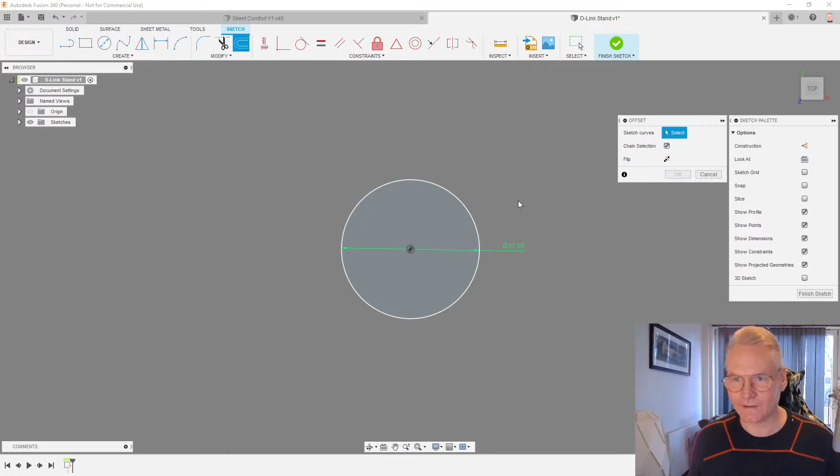Over to my screen, here we go. So I made this circle on the top plane, and I'm doing an offset. The offset's gonna go outside - sometimes it's a negative number, sometimes positive, so you just have to figure that out. This is a positive number. So how thick do we need this mount to be? I'm thinking 2 or 3 millimeter - let's do 3 millimeter.

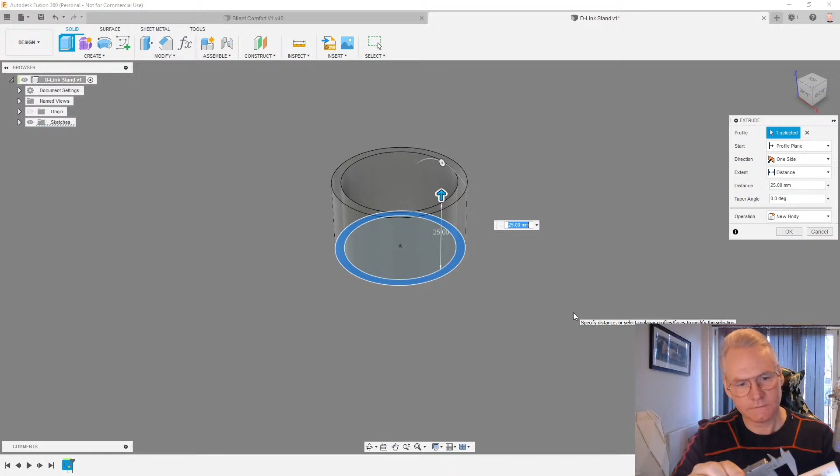Pretty easy, so I'm gonna finish this sketch and extrude it. I'm gonna extrude this up, and I'm not sure how high we need it - we don't need it very high. I'm thinking maybe 30 should be fine. Yeah, let's do 30.

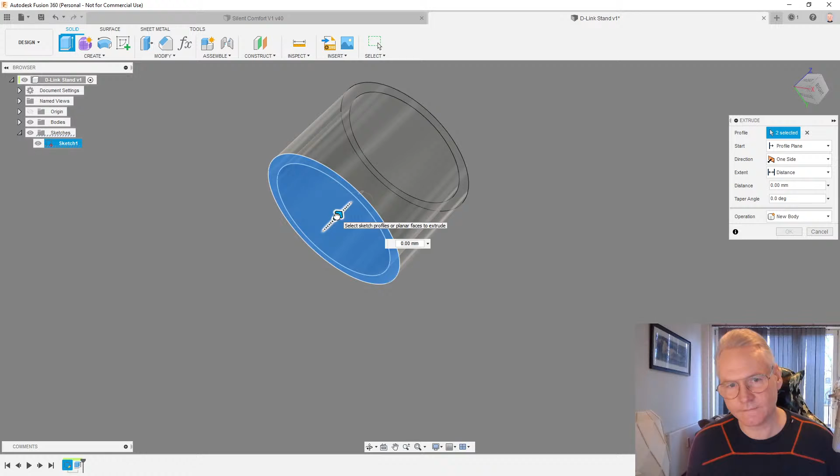But of course we also need a bottom, because now this is just a tube. So let's extrude our sketch again, let's do it negative, let's do it down. -3 should be okay. Yeah, let's just start with that and see.

So I'm gonna change the transparency, the color on my parts. I'm gonna do ABS white - that's A for appearance, and you just find ABS white under plastic. Of course you can change the color on this one if you want something else, maybe yellow, or whatever you want. Let's do it yellow.

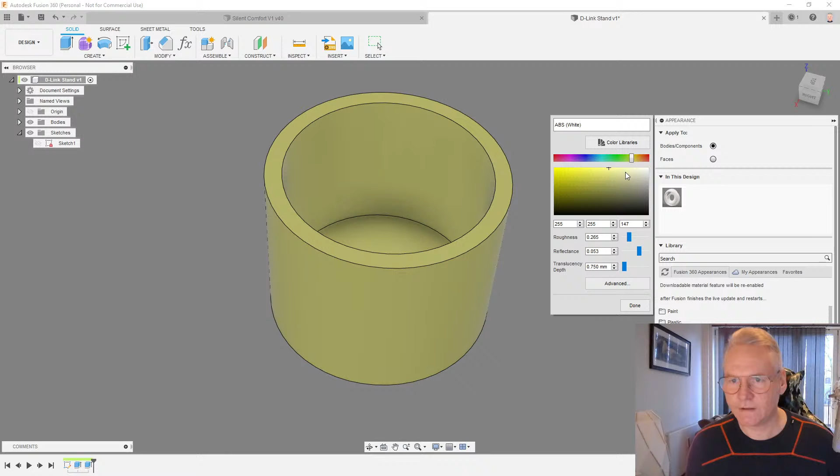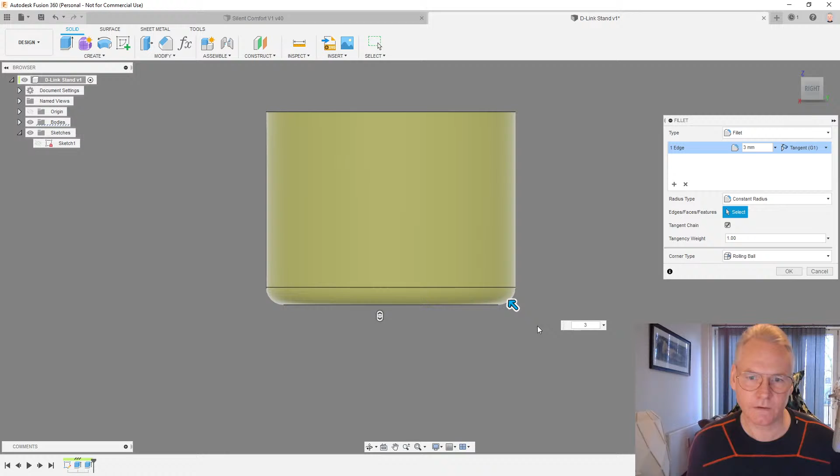We could maybe do a fillet here, let's do 3 millimeter fillet just for better looks. Actually, fillets in this direction don't print too good, because we have layers building up the fillet, and you have to go low on the layers to get a nice fillet. But let's just do it anyway. Chamfers print better in this direction. If it was fillets in this direction, it would print good.

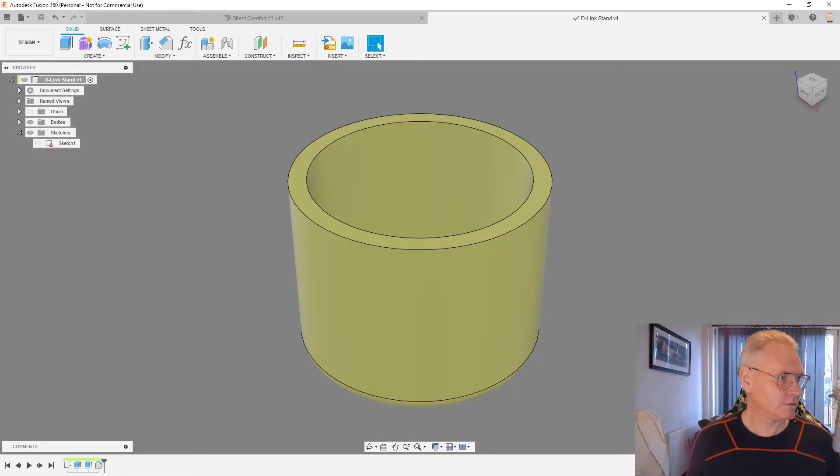And we need some holes in this guy. At this point, I'm not sure how we are going to make it. Let's do an offset plane. So let's just offset this 37 divided by 2, plus 3, should make it just outside.

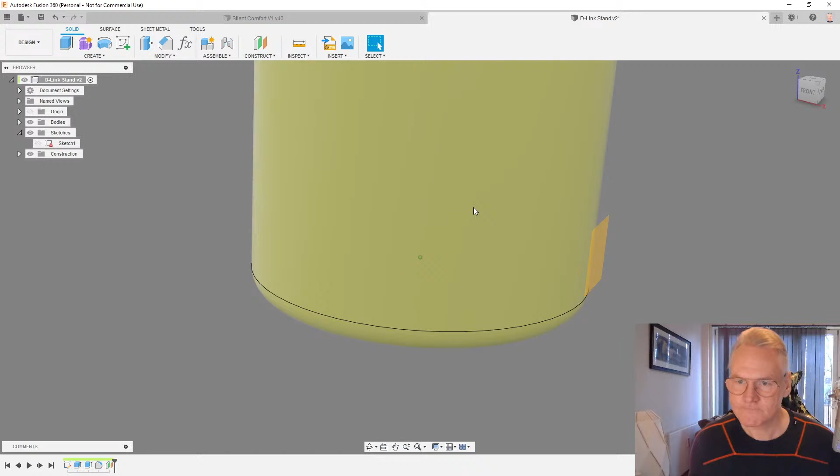So let's draw something here. Let's first project our body - P for project, select body in the selection filter, click the body, and just OK.

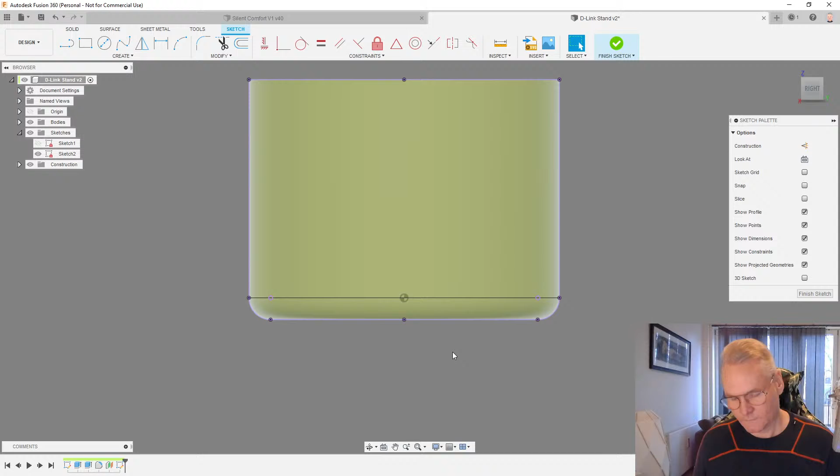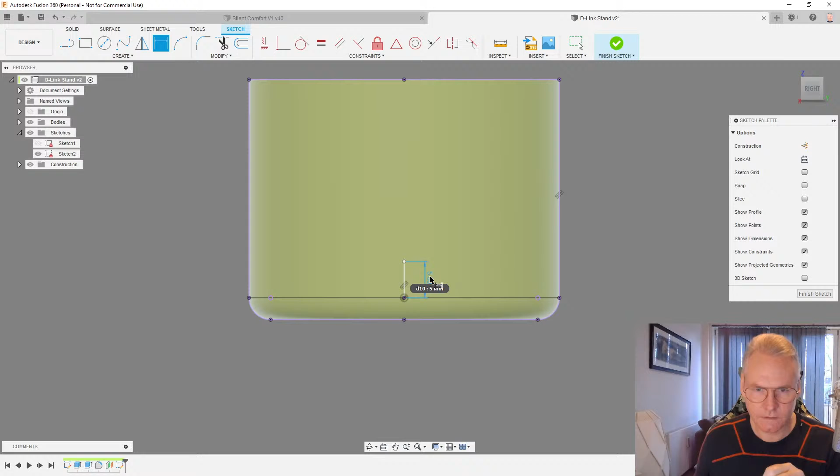So let's find the center of this body - should be about here. I'm gonna do a line, maybe like 5mm up. I'm thinking we are going to use some screws here, so let's just try with, let's do it 6mm. We can change this later anyway.

And let's do a C for circle. I'm gonna make that, yeah, let's do it 12. So this is now 12, since I connected to this point, and we have 6mm here, so this would be 12.

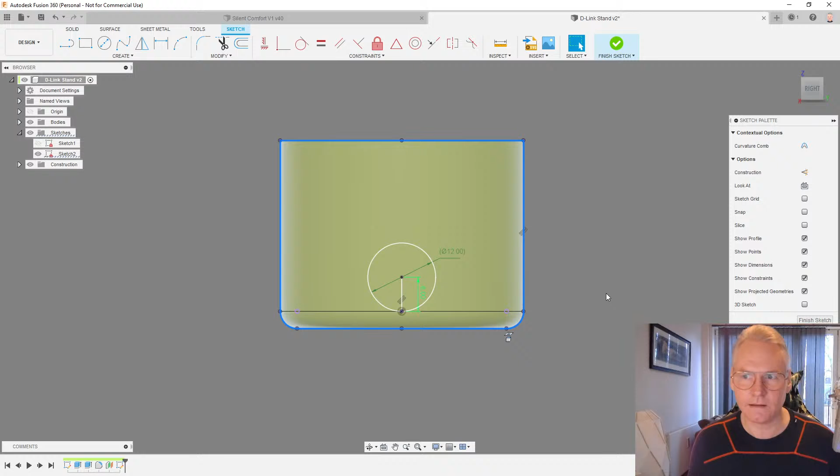What we can do is just make the body construction lines. So just double click the line and hit X on the keyboard, and you have construction lines.

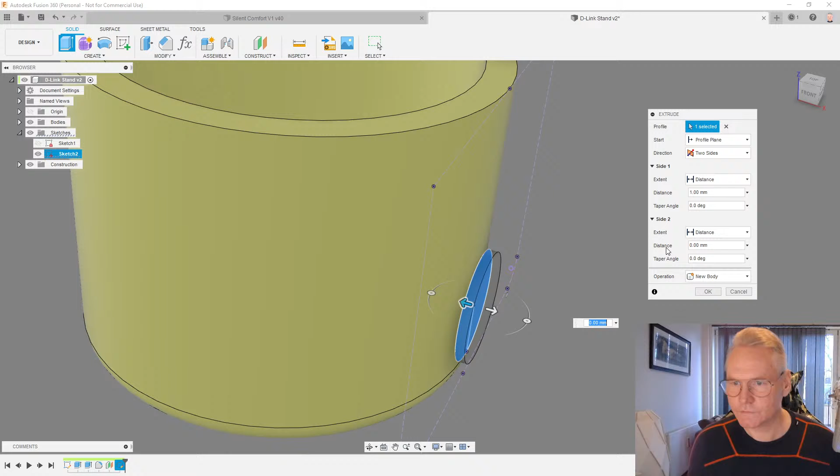I'm gonna extrude this guy, actually 2 ways. I'm gonna do 1mm outside, and in the extrude palette I'm gonna choose 2 sides. For the second side, we can try to use not distance but To Object, click our body, and it should extrude exactly into the body and do join. We do OK - that looks fine to me.

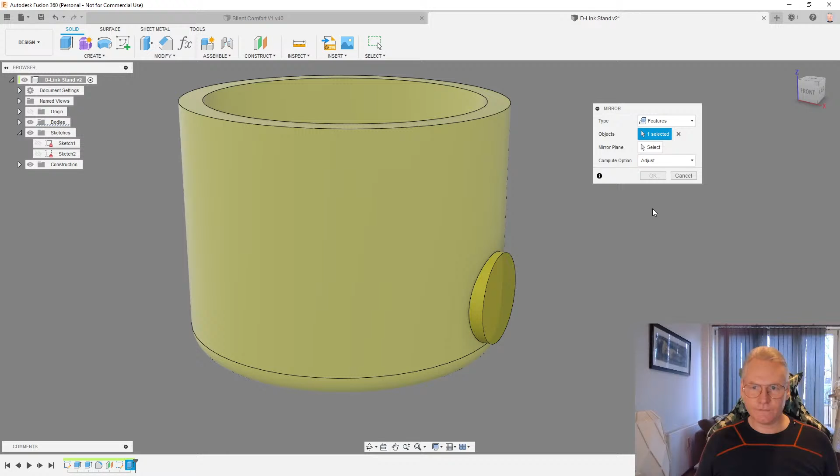We can actually mirror this guy now. Let's go to create, mirror. We're going to choose in the mirror palette, features. I'm going to click my extrude and select mirror plane, this plane, and just OK. Well, we should have that on both sides, so that's what we want.

This is great, and let's make a hole. So I'm just gonna click this face, and do H for hole command. We can just drag this center over to this center, so it snaps in place. We can do this all through our body.

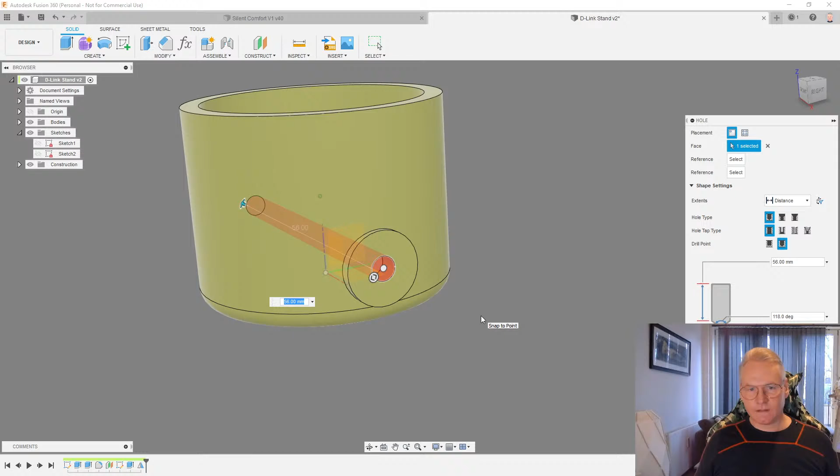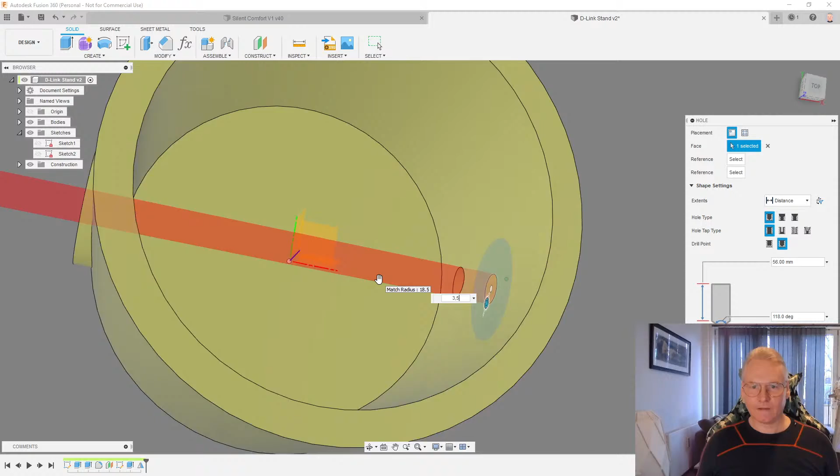The size of this hole, let's do 3.5. Or should we... I'm just thinking about how we're gonna mount this thing, if we're gonna screw from the inside and out, or from the outside and in. I'm not sure at this point. Let's make this 2.5, we can always drill it up, make it bigger. So it's better to have it smaller than too big. Whatever we decide for later.

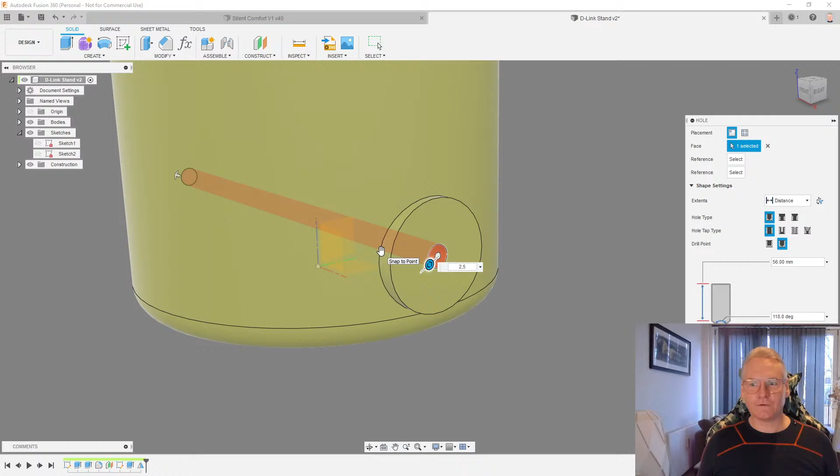Do OK for that one. We could maybe do a chamfer here, 1mm chamfer, just for a nicer look. What do you think? Then we don't need supports, so it removes the need for supports. That's nice, we'll do this one as well.

The thing is that, let me show you. So this, this thing has the power supply going inside here. So we need to make a hole, because this one we can take out and we can put it inside later.

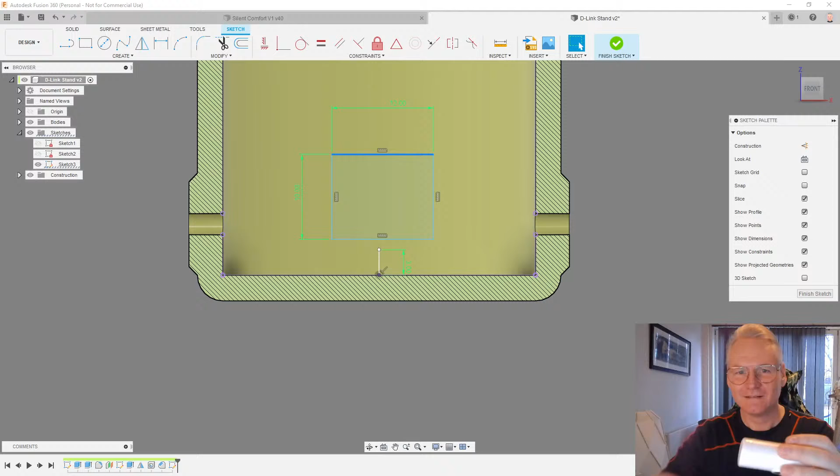So let's measure this guy. It's about 10 millimeter wide and 8 millimeter thick. So we need a hole for that. Sorry for that. So we can measure this hole as well, just to see what they did. So it's actually 8 by 10. Well, I would like to make it a little bit bigger.

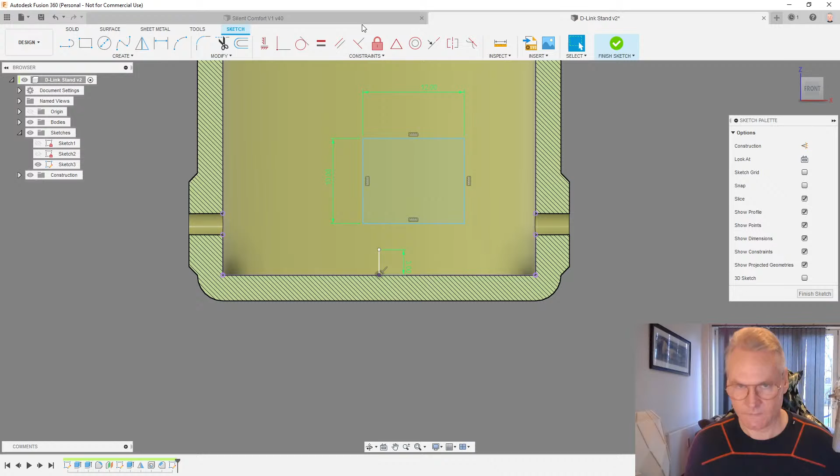So now we need to place this rectangle, and we want this point to be on the middle of this line. So we're gonna do the midpoint constraint. I'm just gonna click the line and the point. Doesn't matter which - if you do the point first, then the line, or the line first, doesn't matter.

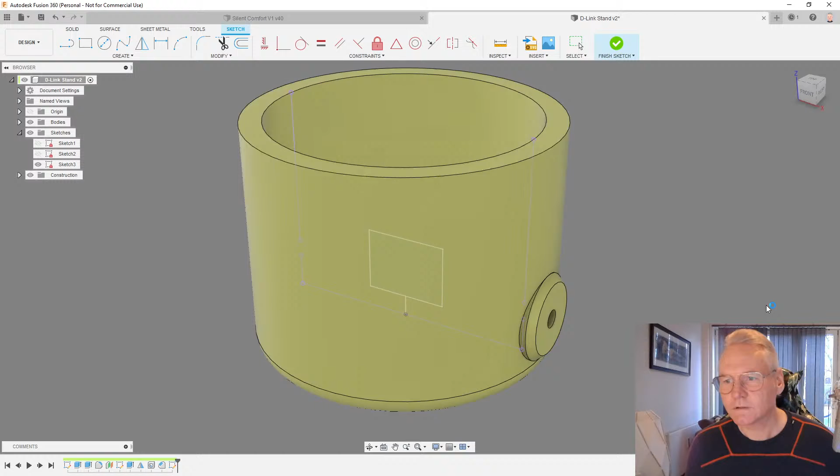I do think it's a little bit high. Let's do 9, 9 by 12. I'm gonna finish the sketch and do an extrude. It doesn't matter if we do it on this side or that side, so let's do it on that side.

And this should print just fine, we can bridge this. I don't think we need support here. So this should do it for us.

And now we need something, sort of a mount down, so we can screw a mount around this holder, so we can screw it somewhere, you know, fix it somewhere on the wall or on our 3D printer. And we need to connect these guys so this one can twist.

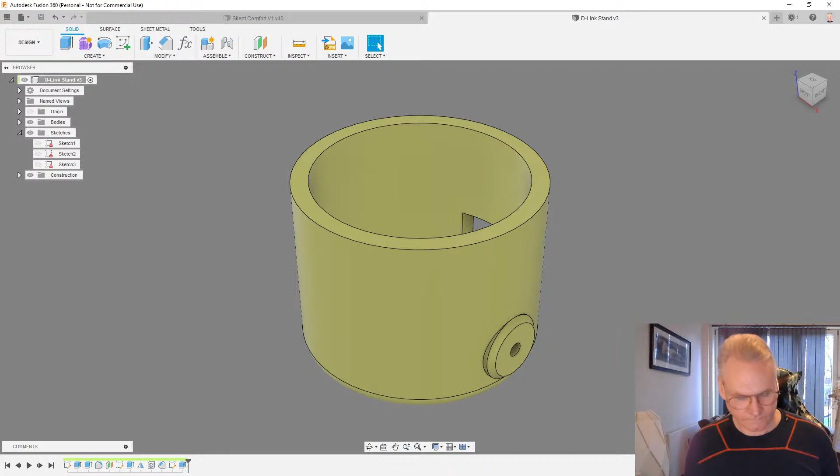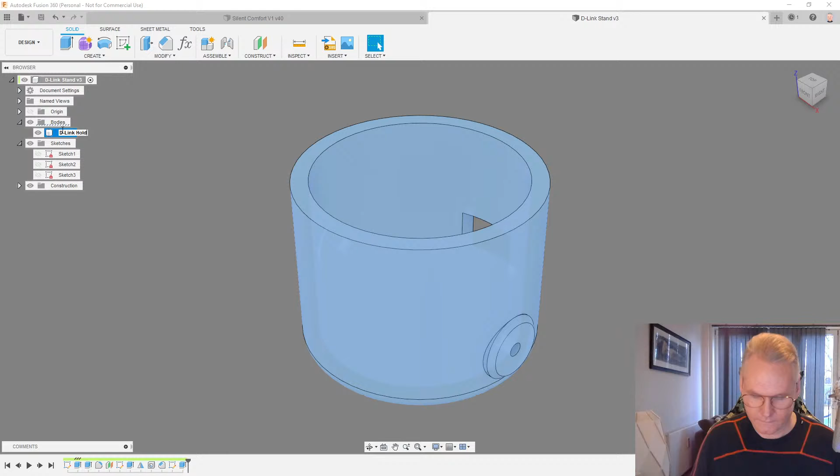So let's create a component from this body. So the D-Link holder. I'm gonna click the body, right click the body and create components from body. Now we have this component.

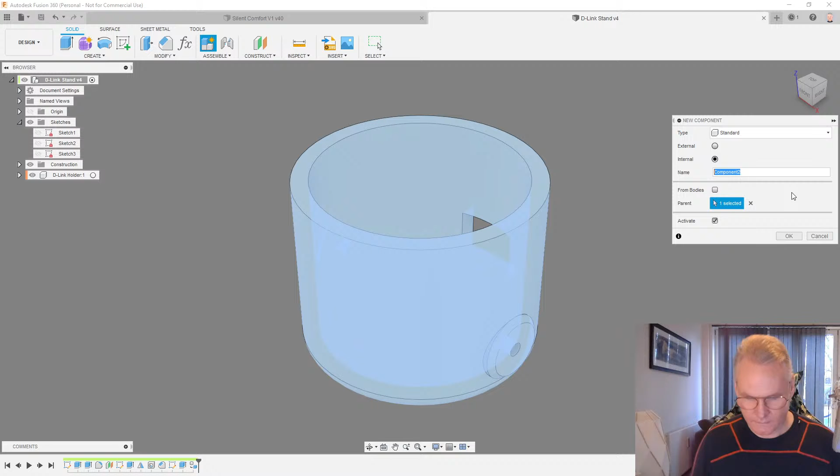And we are gonna do a new component. So this is gonna be like D-link holder stand or something. So let's just start draw something.

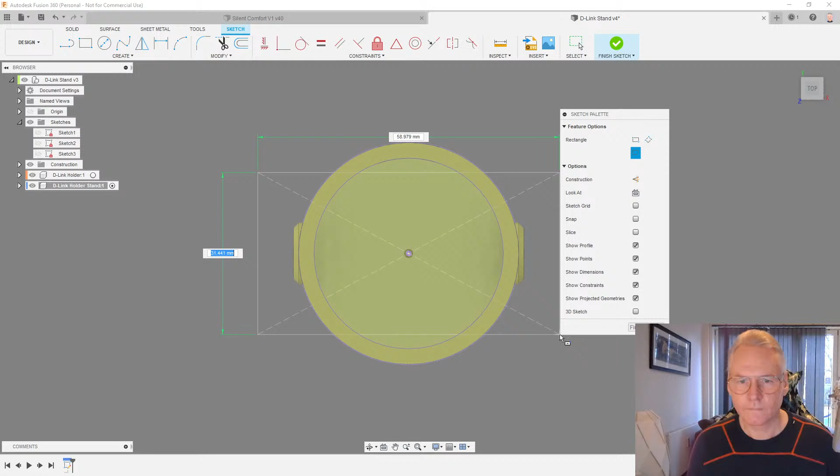I'm gonna draw something on the top plane, and we can project our body. Actually, we can do entities and do just the inside and this outside. Okay, so let's do a rectangle, and we want a center rectangle. Just gonna draw it out a little bit.

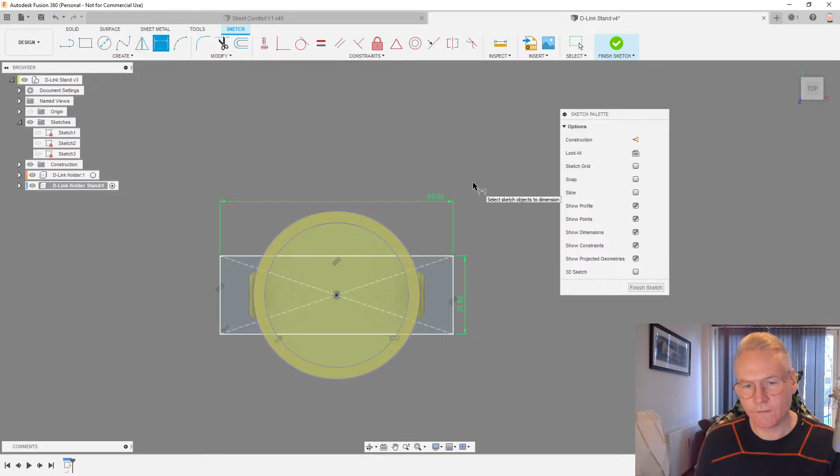So if this is for our 2020 extrusions on the 3D printer, we should make this 20 wide. And let's do it 60 long, just for a starter - it might not be enough. It depends on where we want our screws to be, if you want them outside or under, I'm not sure at this point.

Let's just start extruding this guy. So E for extrude, and just pick all the profiles. And I want this to be offset, so I'm going to choose offset plane in the extrude palette. So let's offset this, I don't know, maybe 5, so we're going to do -5.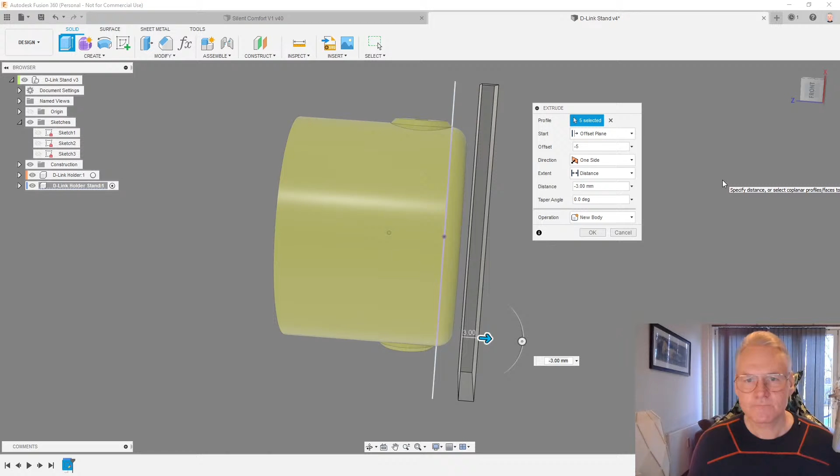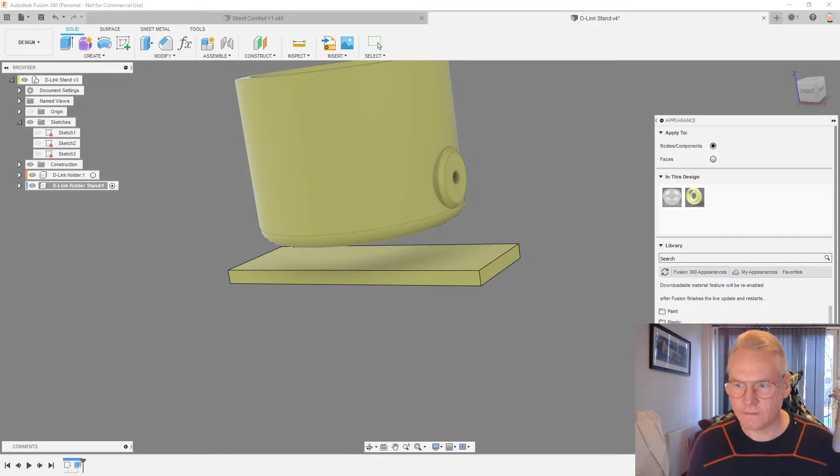We might need more, it depends on how much we want our body to tilt. So let's do -10, then we have some room to tilt it, which we want. And okay. So let's do A for appearance, and I'm going to drag also my yellow ABS color over to this body.

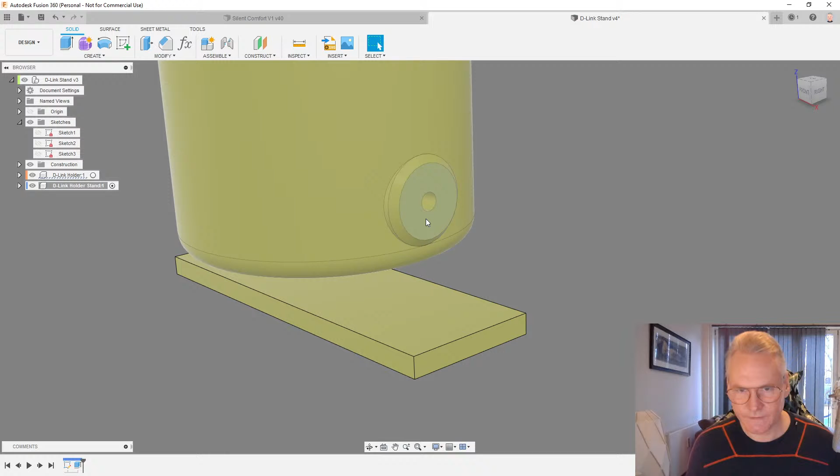So now we want to connect these two, and for that I think I want to draw something on this face here. Let's do a new construction plane on this face, so it's gonna be not offset, it's gonna be just on the face. And create a sketch here, and we can do P for project and entities. Click this face and do OK.

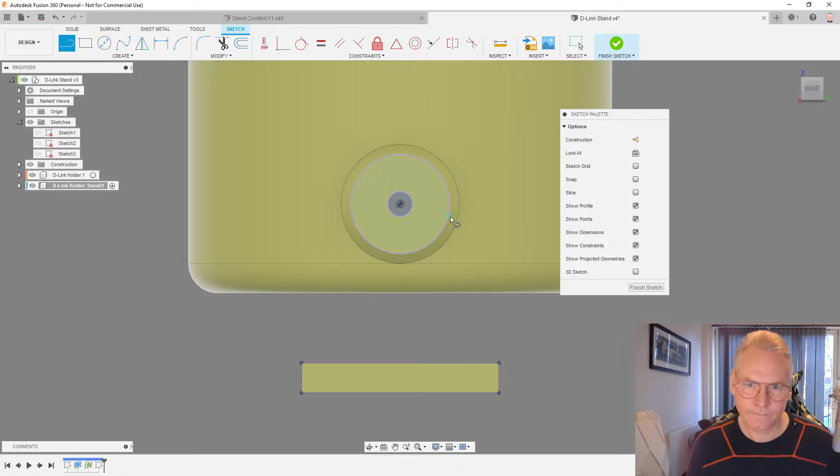So we're also going to project this guy, our lower part. So let's do L for line and click the outer circle and just drag it down and hold shift - if you hold shift, you get the tangent constraint. We want that, and we want it straight down like this. Same on the other side.

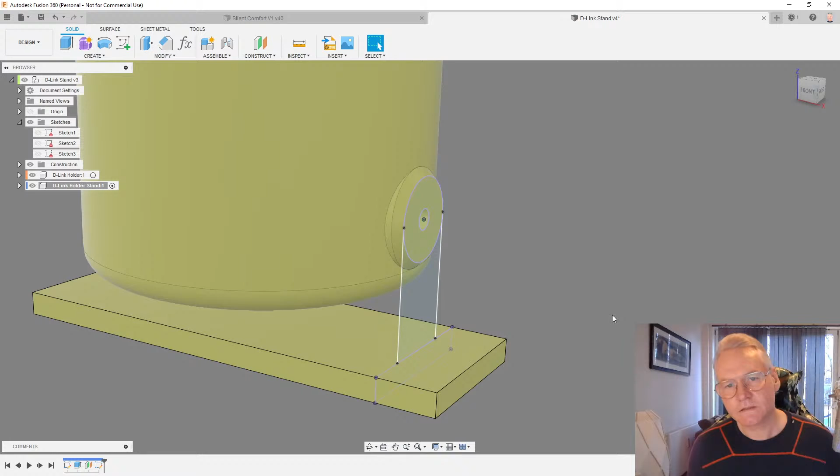Finish sketch, and let's do an extrude now. We'll make this 3 mm.

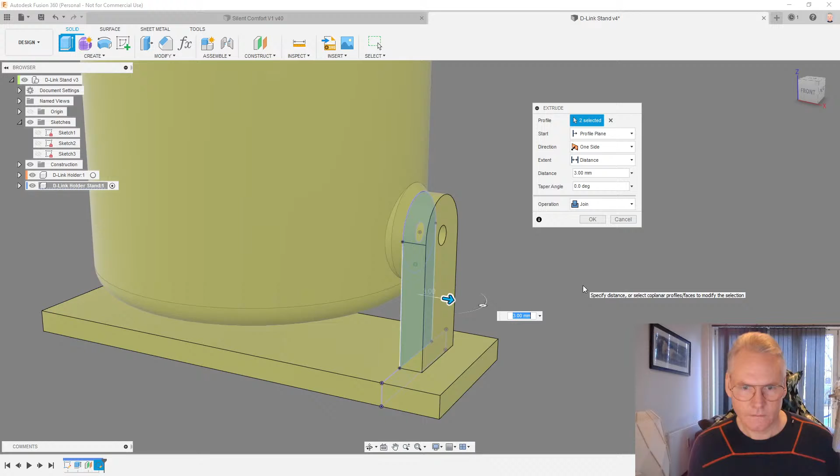The only thing I don't like about this is that this thing cannot twist. So if we did want it to twist, we can of course do that in different ways.

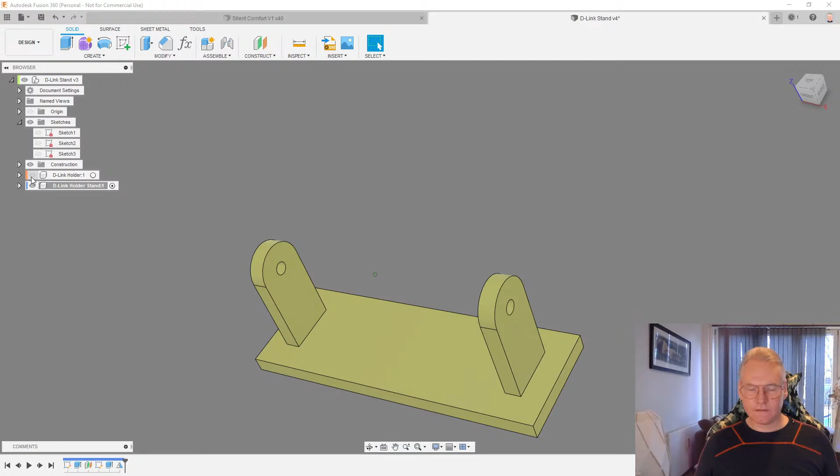But let's just keep on going here now with mirroring the last extrude. So go to create, mirror, do features, select our extrude and mirror plane, choose this guy, and OK. So we have that on the other side as well. So now this is what we have. So what we could do is like a center hole here.

Let's just grab the center of the hole and bring it over to this point. Then we are able to actually, if we only do one screw, this should be able to twist around our screw. So that's one way to do it.

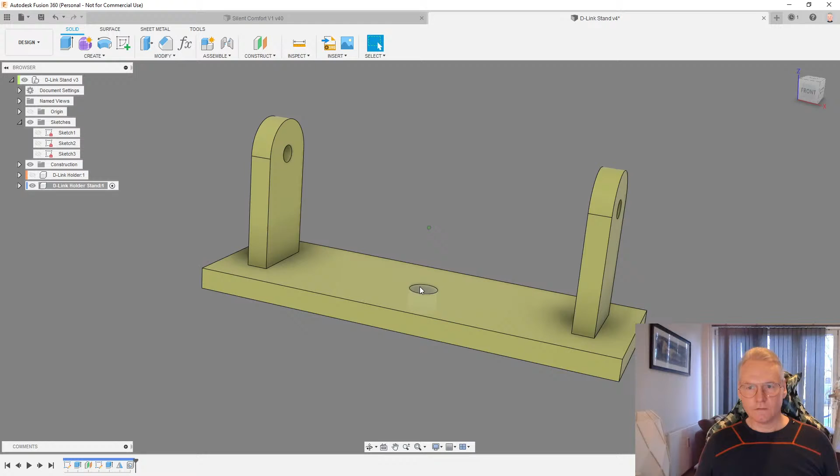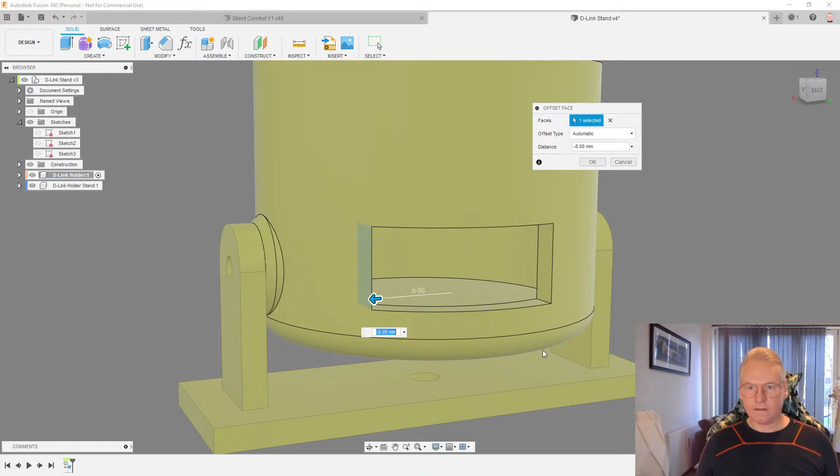Another way to do it is, of course, we can just make this hole bigger. What we could do is move this to the side, so that we can actually twist the camera inside this body. Something like this.

That's also an option. I'm not sure what is the best way. So -8. Of course, this is not so easy to bridge. So if you do it like this when printing, we would need to have support here. But I guess that's okay.

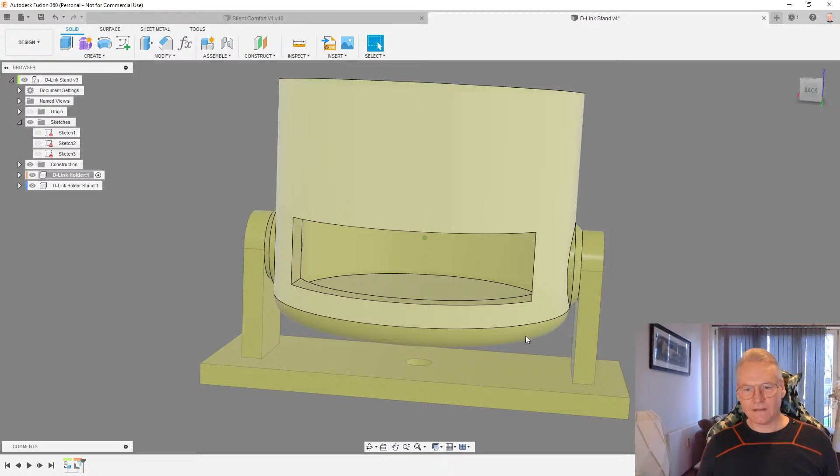So let's just do both ways. Doesn't really matter. But actually, I would like this guy to be smaller, so it doesn't stick outside this one.

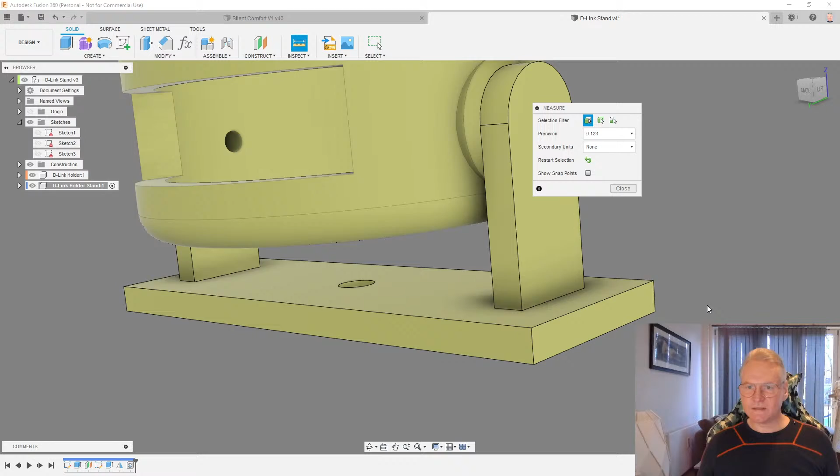So let's go back to our stand. Let's do some measurements. Click inspect and click this face and this face. So it's 4.5 millimeter. Let's go back to our sketch.

So we need to do 16 minus 9. So this is nice.

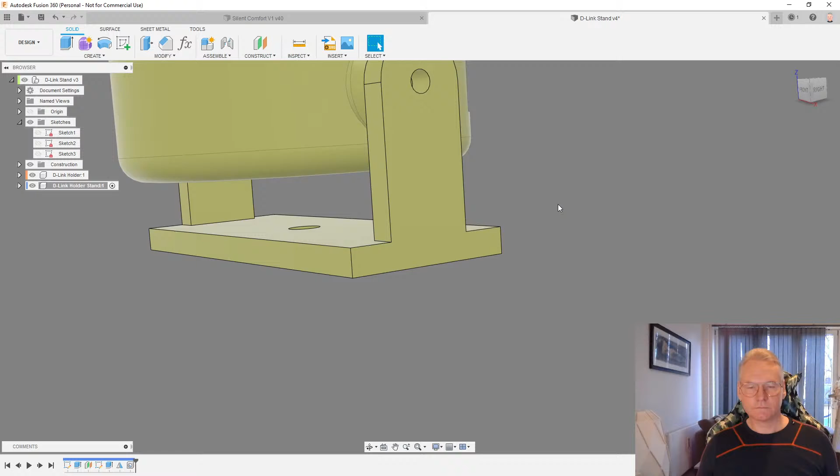And what we could do here now is we could chamfer either this edge. Let me see, this edge is 5 millimeter. So if we do 5 millimeter here, we get a result like this.

What if we also do this one? That would not work. So what if we do this one? Is that nicer?

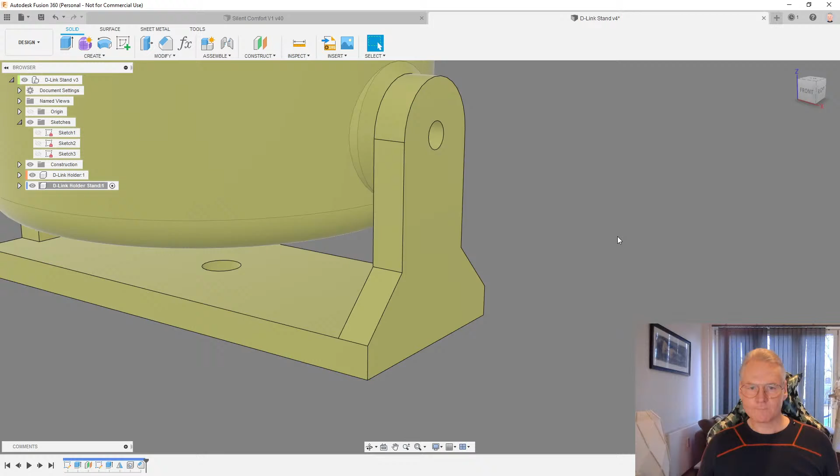Let's just try and see what would be the best option. What if we also do a chamfer here? That does not look good. Not sure what would be the best option actually.

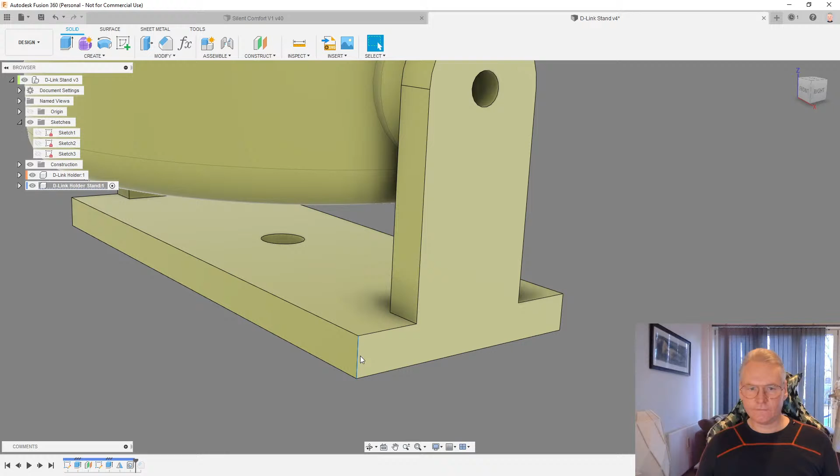What if we do a fillet here? I guess that's okay. Let's try something else, let's try with a fillet here at 5. F for fillet. What if we do that and maybe a chamfer here?

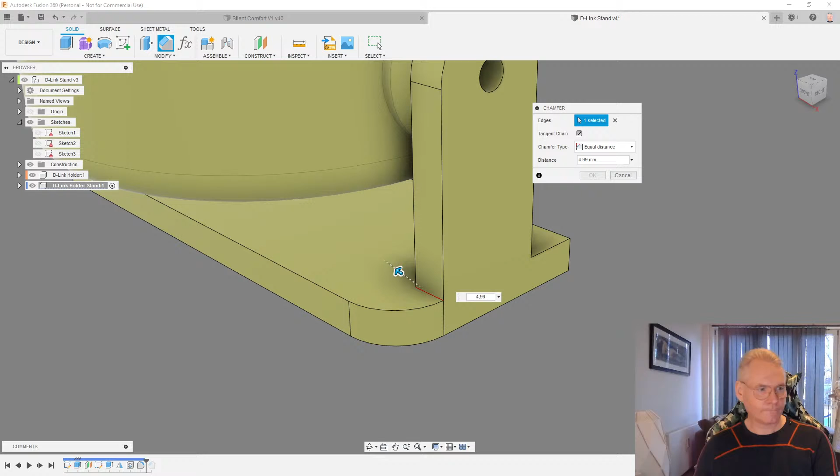Not sure how we're gonna do this. What do you guys think? Not sure. We can always change it later.

Let's have a look at the chamfer version again. I think I like the fillet side better. I think we're gonna do the fillet version. So let's do all the corners in a fillet.

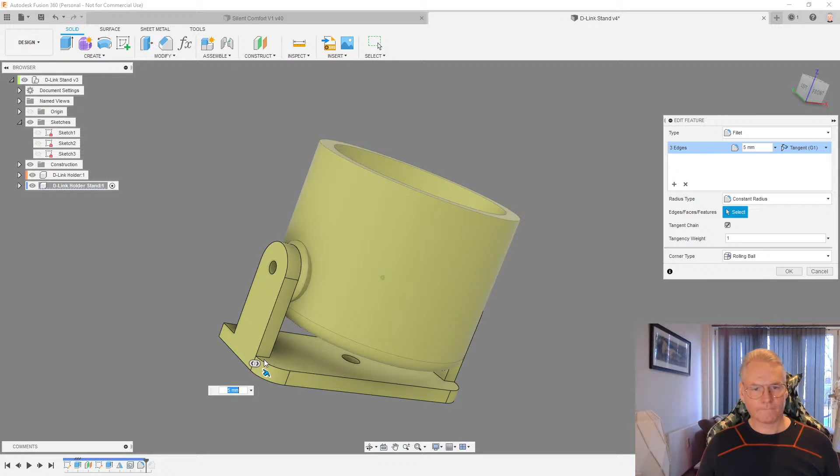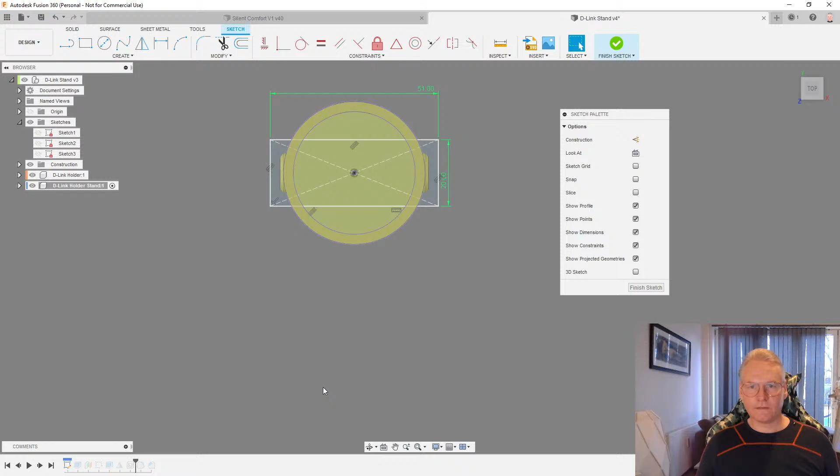Actually, what we also could do is make this narrower. It doesn't need to be 20. So let's have a look at that. Let's just first see how wide is this guy. This is 10. So what if we do it 10? Doesn't really need to be wider.

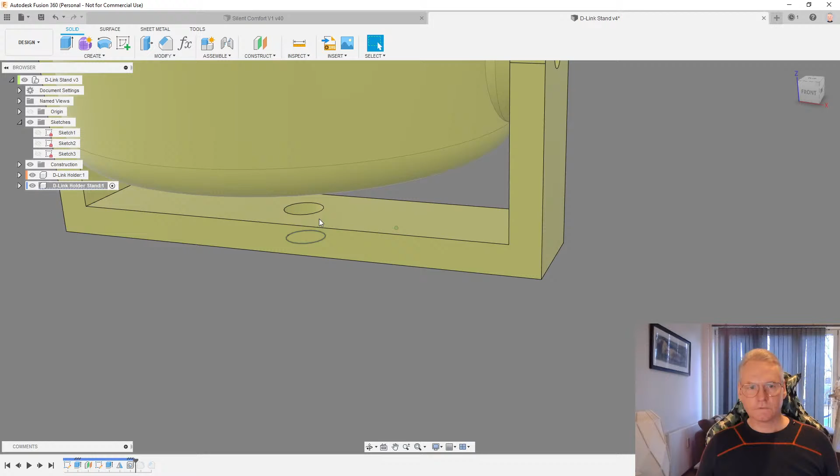I'm gonna do this hole 5mm, because if you have 4mm T-nuts or hammer nuts, then you can use that, or 5. This is of course for mounting on the V slots, which is 2020.

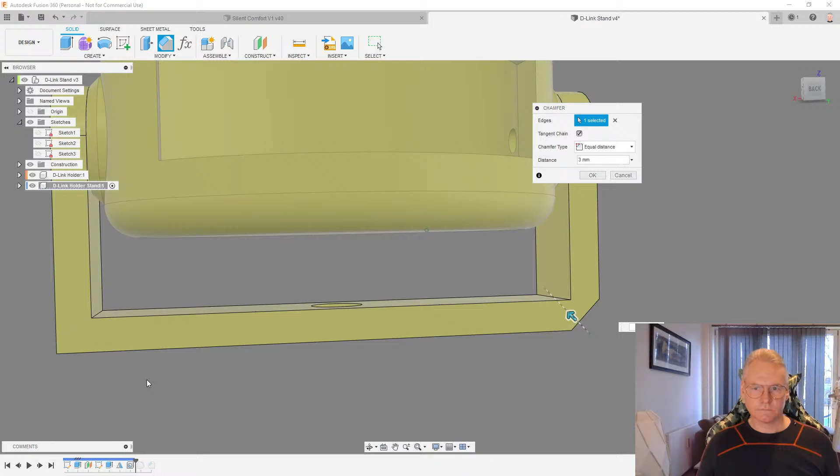If we'd like to have it like this, we could also do some chamfers on the side here. Maybe something like this. And also on the inside.

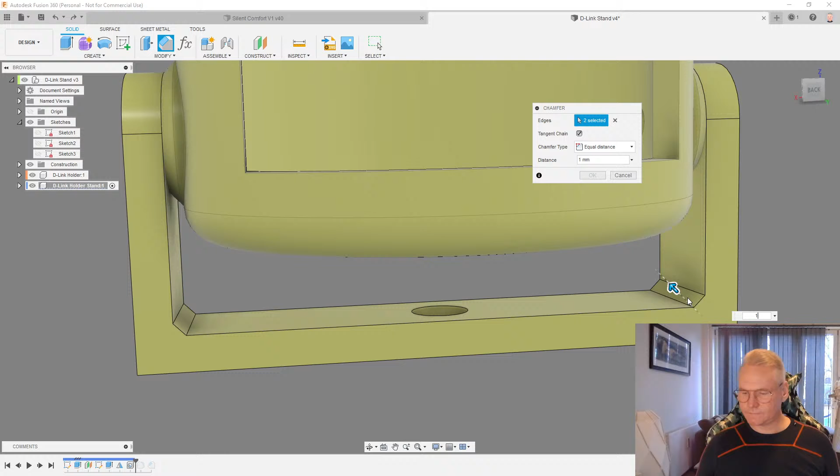So my chamfer, I lost my chamfer. Let's do the inside first. Just 1mm. And then another chamfer on the outside, 3mm. Something like this.

Now we have to figure out how to connect these guys, because screwing from inside and out is not a good option. The screws will be in conflict with this D-link cam.

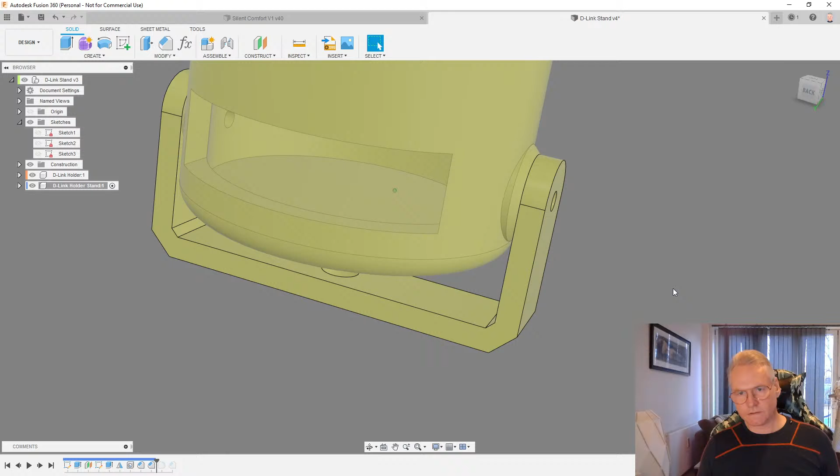So what I would like to achieve is to screw from the outside here, and let's measure. So from the outside and in, we have 7mm.

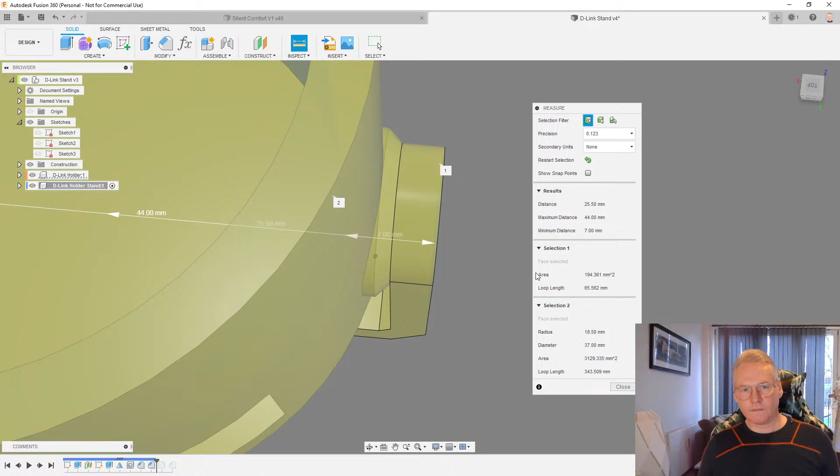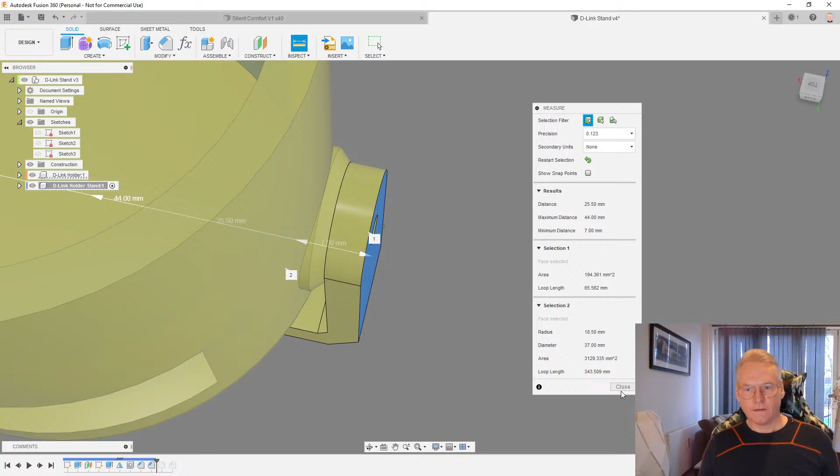And that should actually be okay using an M3 by 6 or M3 by 8. You can do M3 by 8 with a washer. It should be about right. But I think I want a thicker part here.

So let's go back to our holder. I'm gonna go back here. So I want this guy a little bit thicker.

So I'm gonna extrude this 2mm out.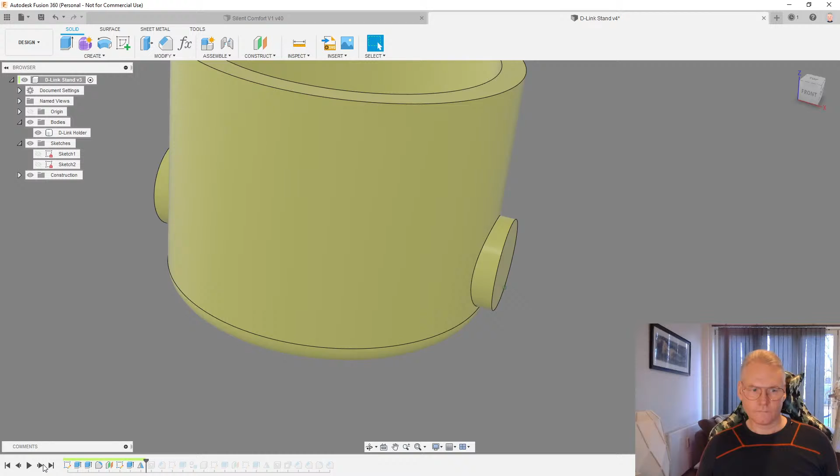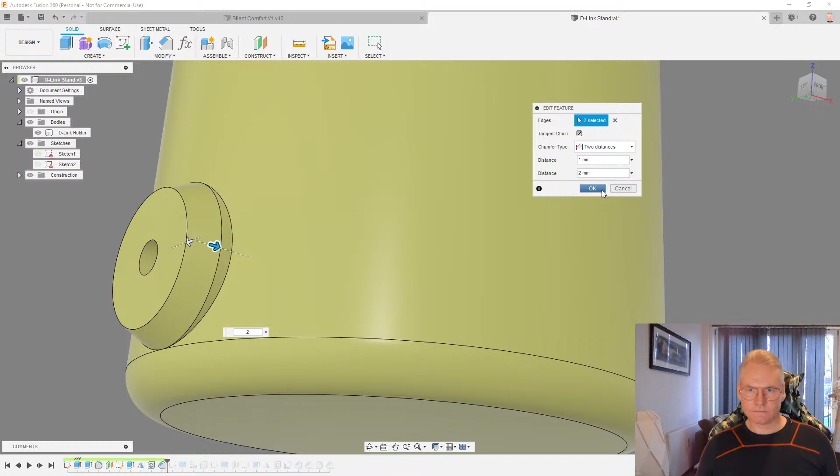And now we have to change our chamfer. I do want to make these 2 distances, so I want 1mm outside, but 2 inside, like this. That is great.

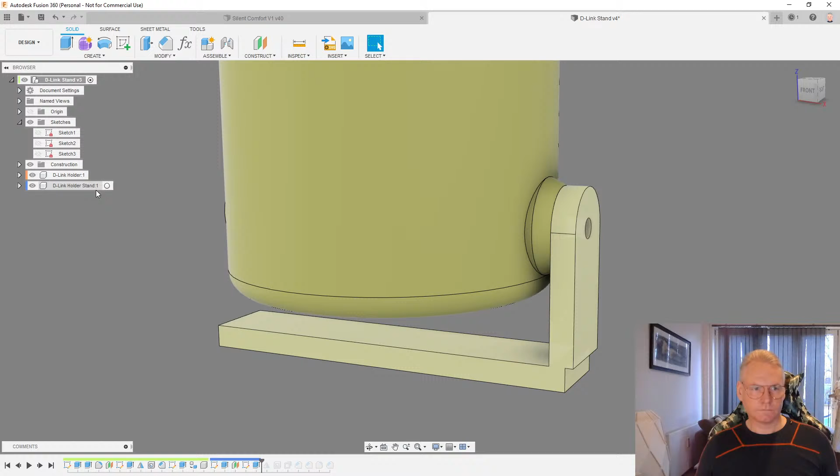Okay, so of course now we need to change the dimension on this one. Not that one. So we need 2 more millimeter here. 53, like that.

No, I'm gonna delete this fillet and that chamfer over there. So this one should print just fine.

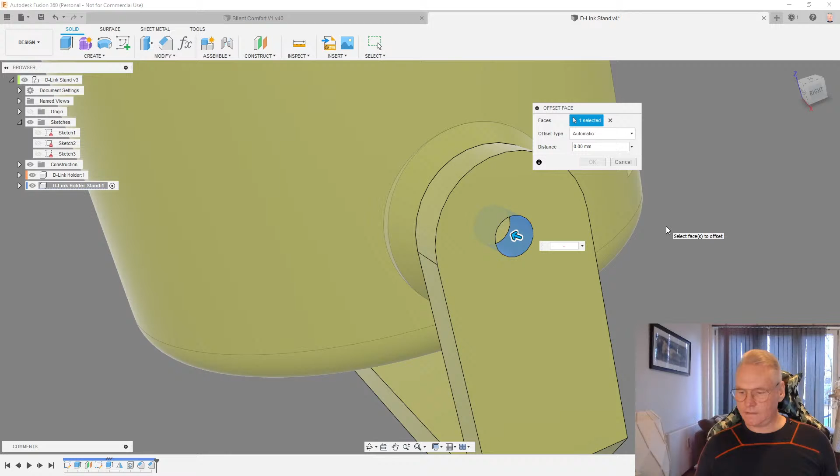I want these holes to be a little bit bigger, so these are now 2.5 in diameter, so I'm just gonna press pull it, really. Negative 0.5, the same on the other side. I'm gonna control click this face, like that.

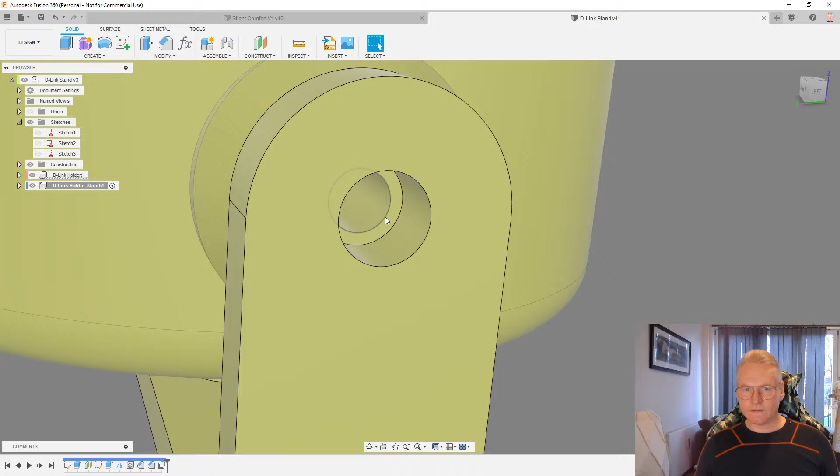So now let's do inspect and click our edge. So the diameter now is 3.5, which is fine, and this one is 2.5. Which means we can actually use this as threads. It will self-thread inside the inner body.

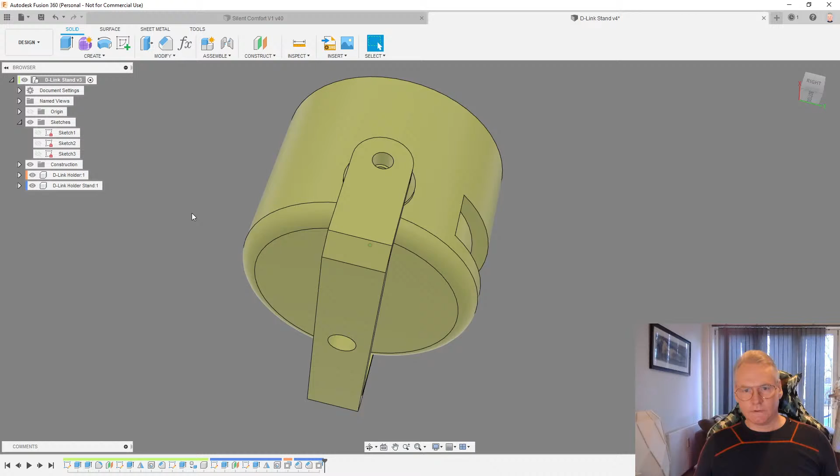And actually, I think I want to go with this design. I want to print it and test it, and then I can come back to you with the results.

So let me just show you how I export this into Cura. I'm going to tools and make, and just click this body and do OK.

So D-link holder, whatever name you find. And this one doesn't have a name, so let's call it the D-link stand or something.

Let's save that. Let's go to Cura. Actually, I'm gonna start another session of Cura because I need this to be live. Actually, I'm gonna show you something because I need one more part of this.

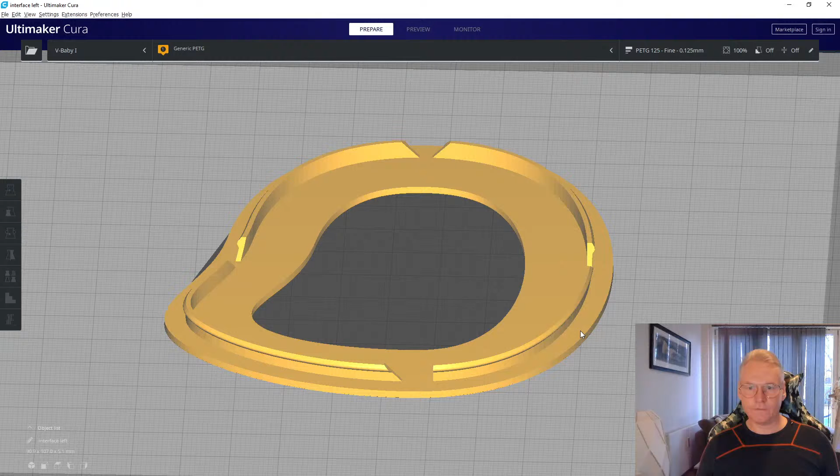This is for another project, but I need a mirrored part, so I'm just gonna click it and hit M for mirror. And then I need to flip it, so need to flip it like this way actually.

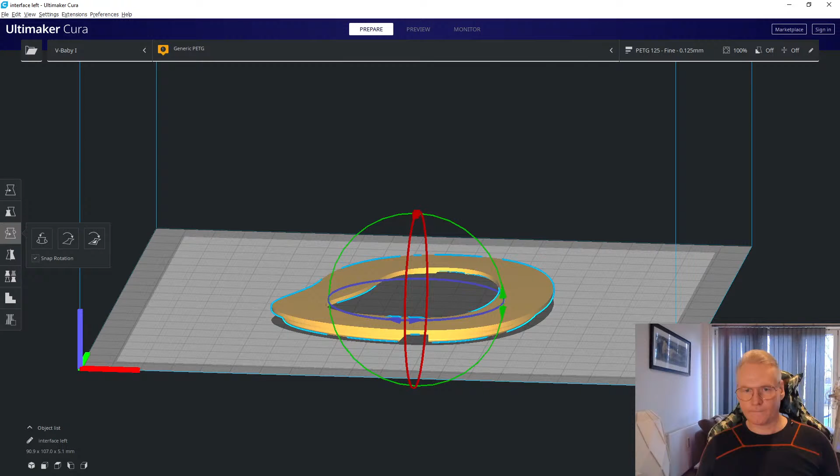And do R for rotate, and just flip it 180, like that. Then I can slice this as well, and I need to print that one soon. Let's go to my other session of Cura now and import our D-link.

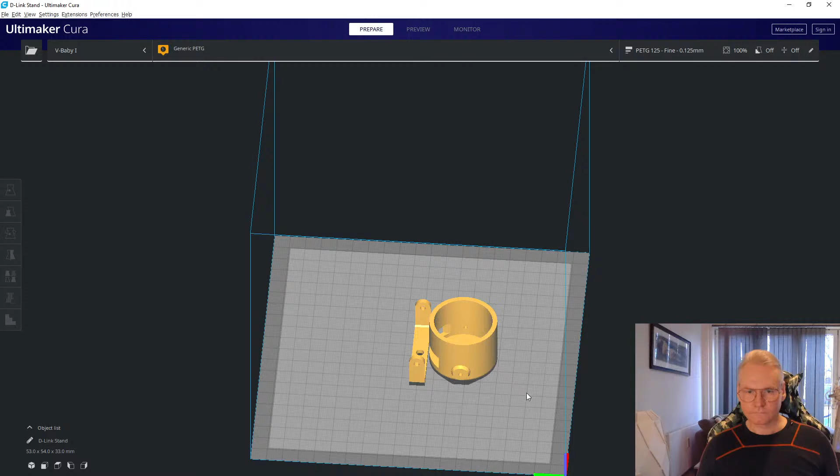Let's take both of them. So I'm gonna move this a little bit. Doesn't need to be so close, I don't like them to be so close. Negative 10 maybe, like this.

And yeah, I do think we need support inside here. Let me rotate this 180 so it's easier for me to show you what I am going to do.

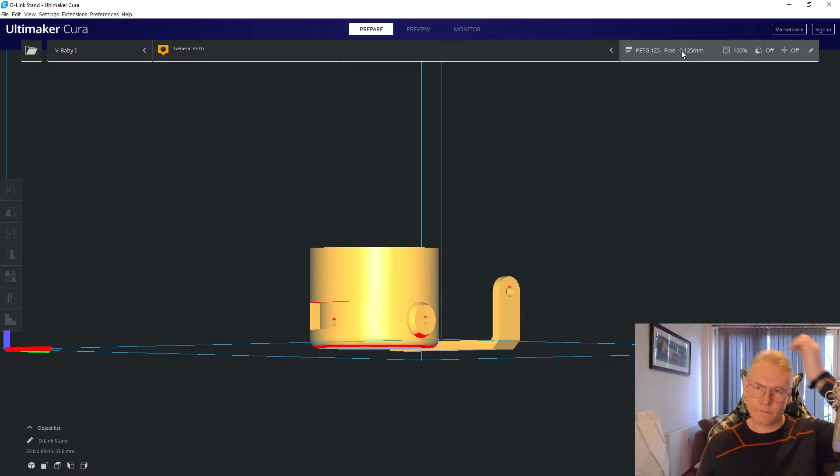So let's go to, I don't know if I'm gonna print this in PETG or PLA, doesn't really matter too much. I want another profile, I wanted to print a little bit quicker because I might be doing some changes. So let's do 0.2.

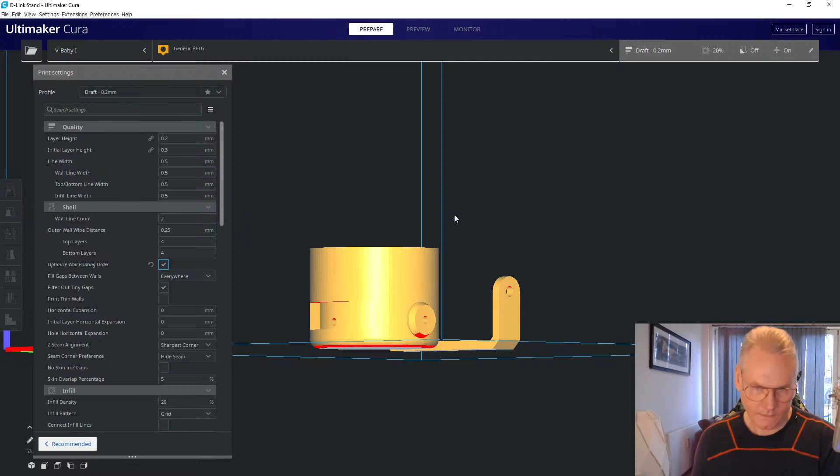And when I print round objects, I don't like to use sharpest corner, it doesn't give us a good result. So I'm going to user specified, and we can do it on the back or on the front. Let's do it on the back because we have this hole here on the front, which means we can have a look.

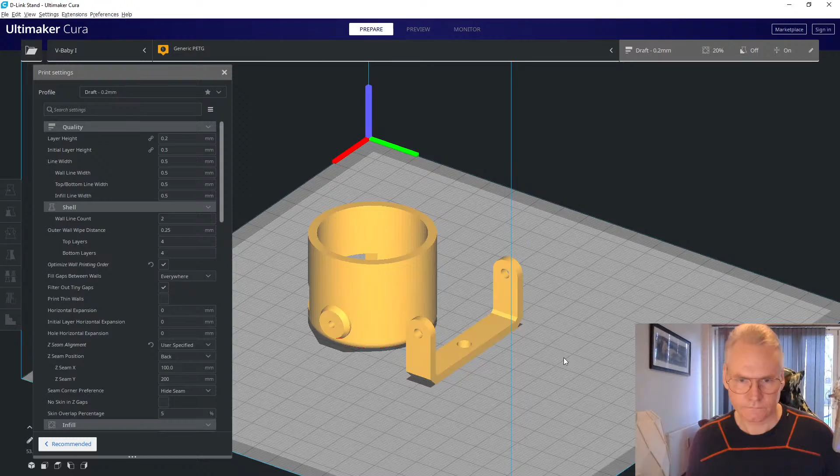So if we go to preview, I'm not going to use brim on this. Let's change to skirt.

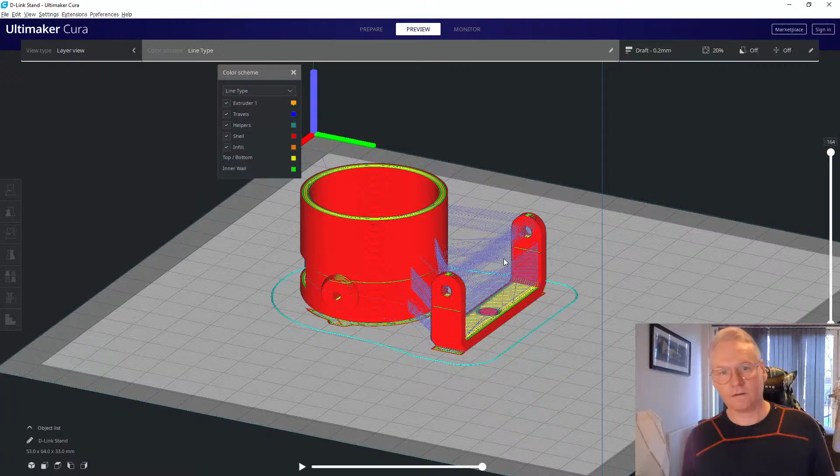So if I now go to line type and choose also travels, we will see that we have our seam on the back side here. You can see that just here. This is the seam on this round object. So it will be on the same place all the way through, which is better than having it in different places, because it looks like blobs if you do that. So this is what I like, maybe you like something else.

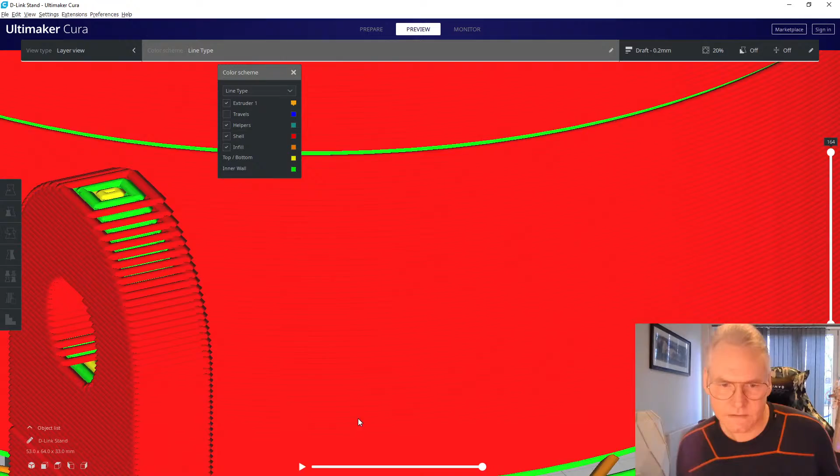But here is something strange going on. This is very strange. I don't know what this is. Should not be there.

So yeah, I'm gonna fix this, and I will get back to you with the results, and I can post the image of the results on YouTube when it's done.